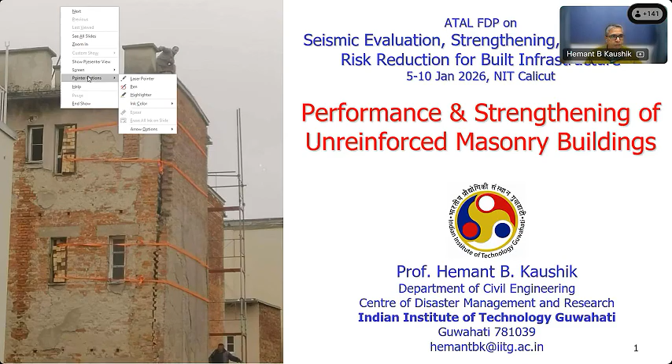The figure you see here is very interesting. I don't know the location of this, but it shows how vulnerable these structures are and how innovative some people are. Somehow they found some technique to keep this wall in its own place. Otherwise, you can see that this is at least 7-8 meter high wall. What would happen if it would fail? Although it is innovative, it is not engineered. Somebody thought something at the last moment and did something just to prevent a catastrophe.

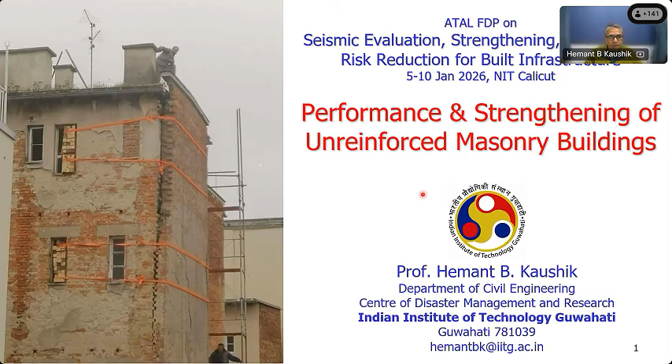Now, such situations, you can see, are found throughout India. You can find such things throughout India, throughout the world. So let me first start with the Indian problem.

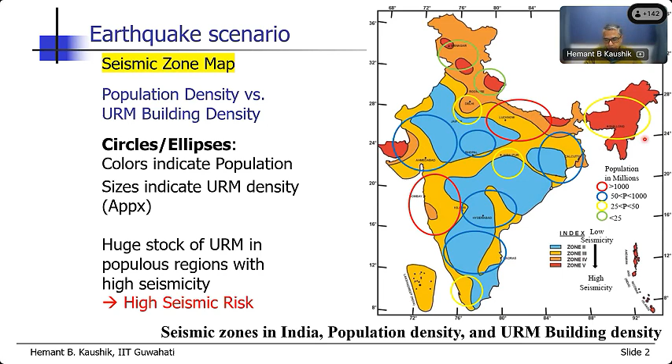This figure actually shows the very high seismic risk we are seeing here: a huge stock of unreinforced masonry buildings in populous areas with high seismicity. That is the problem. Now the question is, how do we deal with these problems? We'll try to answer that toward the end of this presentation.

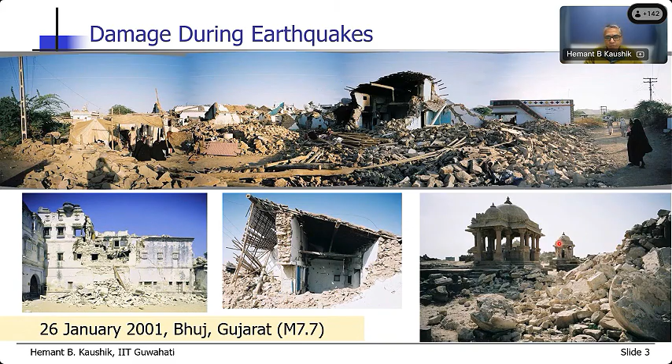Now the question is, why did they collapse? Didn't we have seismic codes or even non-seismic codes for design of these buildings? Don't we know the design of masonry structures? Don't we have good material? All these things come to mind when we see such failure.

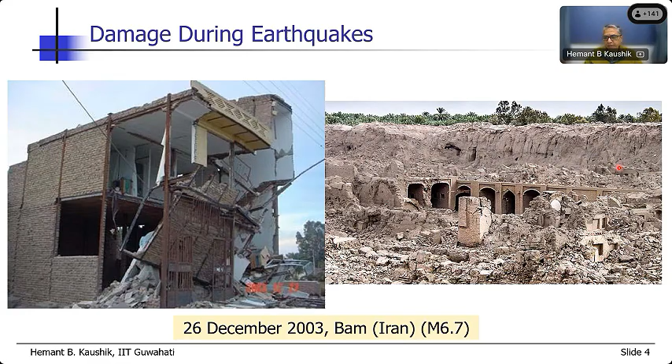Now, it is not only the problem of India. In Iran, a huge number of such buildings collapsed during the Bam earthquake. This left figure is not exactly unreinforced masonry, but barring some reinforcement in the form of steel beams, every other thing is here. All these walls are not really confined using these elements, so you can see the failure. In fact, two complete stories collapsed here, and you cannot see any house here that isn't completely collapsed.

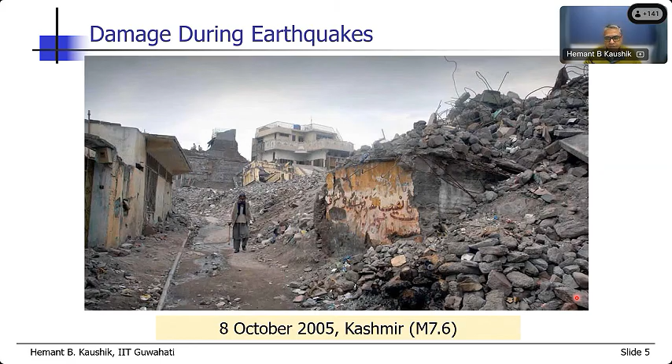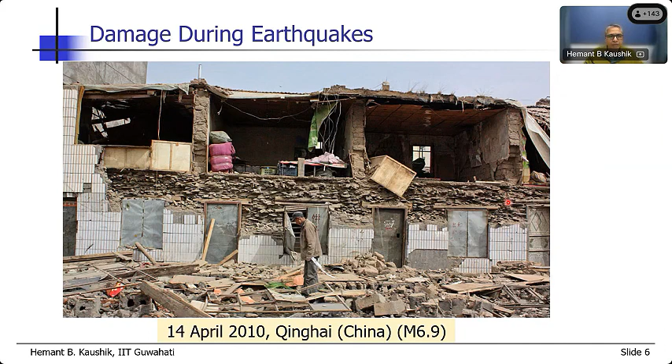In China in 2010, these are mud masonry buildings, mud mortar masonry buildings, again with different types of masonry used - here stones, here slates. You see the thickness of the walls and the slabs is huge, so the mass of the building is really large. The stiffness of these buildings is also large, attracting more forces, but the strength is very low - the tensile strength in particular is very low, and shear strength is very low, so these buildings suffer these damages, resulting in completely out-of-plane collapse of these walls.

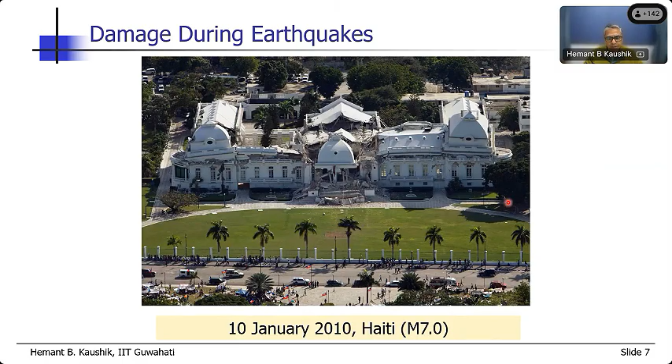In Haiti, a country in Latin America between North and South America, you can see huge palaces constructed of unreinforced masonry collapsing in 2010. A large number of people died during this earthquake.

New Zealand, a developed country - what happened during the twin earthquakes of 2011 was really astonishing to many people. But they have some very old structures; this was a church which collapsed during this earthquake, completely unreinforced masonry. After the collapse, they had a series of discussions for several years about how they were going to retrofit it or reconstruct it.

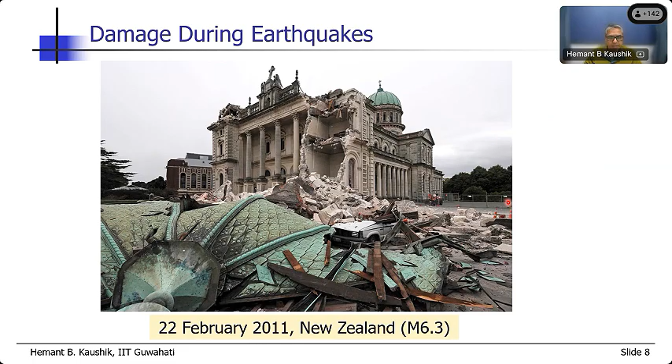Nepal in 2015 - we have seen what happened during that earthquake, with many darbars in Nepal. They have primarily three darbars where there are several temples and palaces, buildings constructed using only unreinforced masonry. Look at the thickness of these walls, again very thick, and the thickness of the slabs. Like I said, most of these buildings collapsed during that earthquake in 2015.

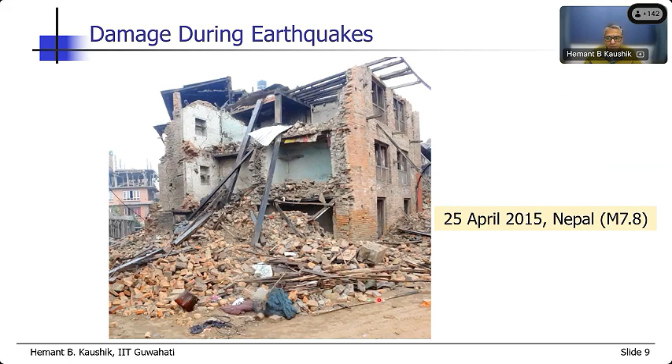These are some common observations we already know about the most vulnerable areas in any structure. The walls near openings are vulnerable because these corners have huge stress concentrations, and damage starts from there. If we can somehow restrain the damage at that location, we can improve the performance of these buildings, and I'll show you some results of how we have done this.

Then, of course, the out-of-plane collapse of walls we have seen in almost all these buildings. Why does this happen? Primarily because there is limited connection between the perpendicular walls, between the wall and the slab, and between other elements of the building. When there isn't proper connection between the wall, the perpendicular wall, and the slab, the wall fails during the earthquake in the out-of-plane direction.

What we have seen during most of these earthquakes is that traditionally constructed masonry buildings, reinforced or laced with wooden material like timber logs or bamboo, survived. There were some damages, but they survived. We conducted significant research on some such buildings, though today I won't show those results. These are really interesting buildings where people didn't have design codes, calculations, or guidelines, but through their own experience came up with certain building typologies.

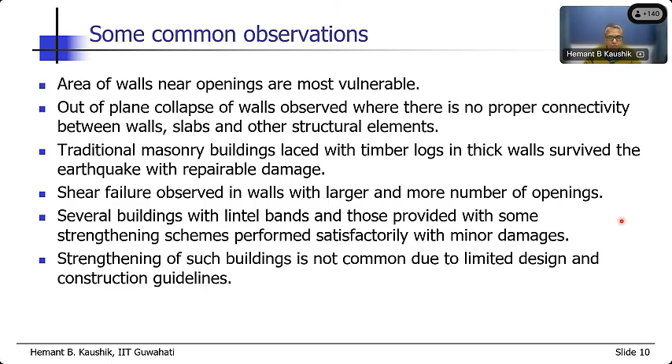We have seen some retrofitting done in these buildings, but it is not common because we have limited design and construction guidelines. In fact, there is no detailed guideline or codal provision available to common people. One technique people have used is strengthening the building using steel elements, which can be used in different forms.

This is a mosque in Port Blair during the 2004 Sumatra earthquake. Many buildings in Port Blair collapsed, but this building, though unreinforced masonry, did not collapse. You can see the steel bands applied on the walls in different ways. The reason was that there was an arch roof here, so to support that arch roof, they provided bars continuous along the length of the building, and on the outside connected the bars on both faces using steel channels. Similarly, diagonal bracings were used in some places.

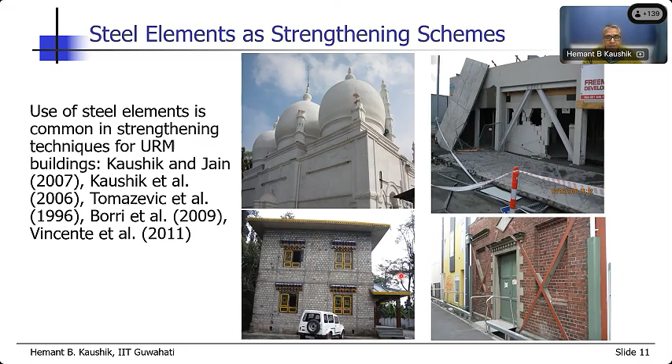This building is from New Zealand, where steel flats were used on the faces of the building. This building is from Sikkim, and it survived the 2006 and 2011 earthquakes without much damage, though there was some damage, again using bracings. People have used these steel elements in different ways without worrying about whether codes are available, since no codes give design criteria or calculations for these elements. But people have used them anyway, and when simple strengthening schemes were used, these buildings survived. This means even minor retrofitting or interventions at the correct time can influence the performance of these buildings and save them.

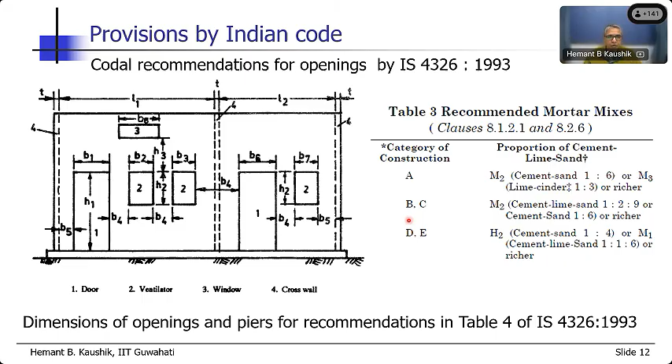Let us look at what provisions are given in some of our codes. We have a very old code, 4326, which will be replaced now, but there are some interesting provisions here. It gives recommendations for the dimensions of openings - any unreinforced masonry wall may have a door opening and multiple window openings. They've given recommendations for mortar mixes, what kind of mortar can be used, and recommendations for these dimensions - how far the door should be from the cross wall, how far from this wall, what the height and width should be. All these dimensions are given, but these are only guidelines for the size and position of openings in bearing walls. Other than that, there are no provisions for strengthening.

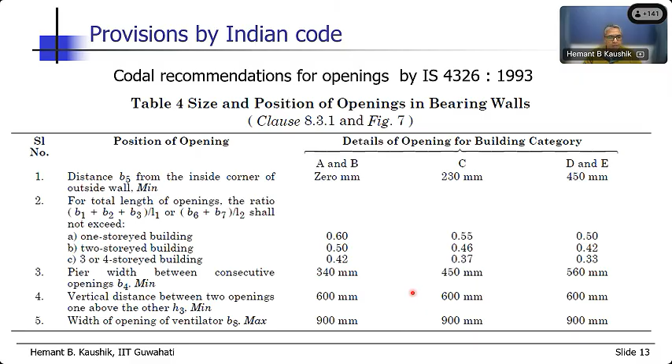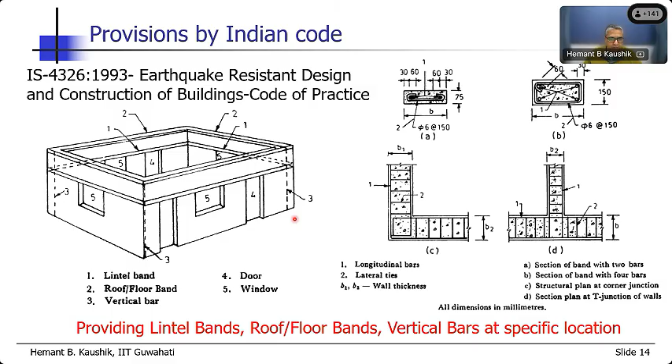They also say that you can provide some vertical bars in the walls. So these dotted lines here, these are the vertical bars.

Here's another code, 13828, again a very old code. It will again be replaced, but it also has some provisions on how to improve the performance. They say that you provide alternating tooth joints in walls at the corners and the T-junctions, which is generally used by the masons.

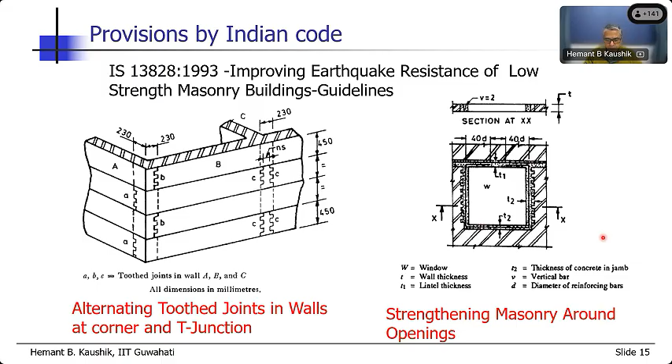It also says how to strengthen the masonry around the opening. They say you provide some reinforcement bar around the opening to improve the performance, because of the known issue that these are the places where we have huge stress concentrations. These issues are known to everybody, that we need to strengthen them. But then you can see yourself how many buildings have these steel bars or these bands at different locations.

Another retrofitting scheme, or here this is not retrofitting but the repair scheme proposed by the code, is grouting or epoxy injection. So whenever we have weak walls, we can inject this grout or epoxy.

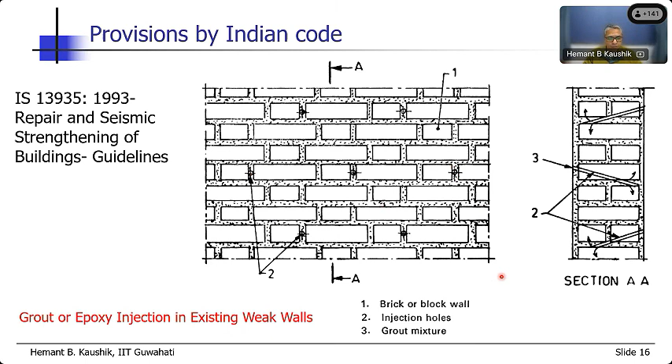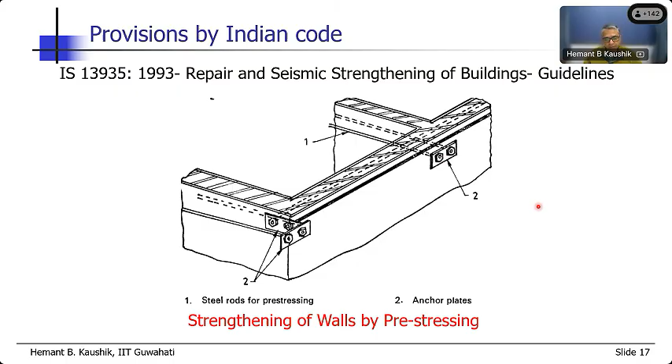One interesting scheme proposed in the code is using pre-stressing bars, strengthening of the walls by pre-stressing. This is extremely difficult because it depends on the quality of the wall, what is the strength of the wall. But anyway, the method is given, and I've seen some buildings strengthened using this scheme.

This code 13935 has another interesting strengthening scheme. It says use the splint and bandage technique for strengthening. Splint and bandage are these members, horizontal members and vertical members. This is the bandage that we provide around the building to keep these walls together. This splint and bandage technique can be used in a variety of ways, and they have also given some guidelines on what kind of wire mesh can be used here.

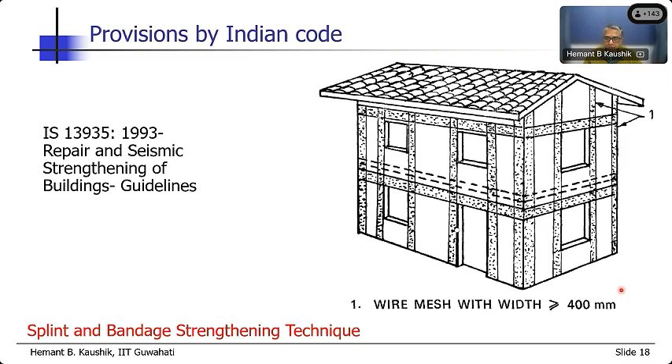Now, though this information is there in some of these IS codes, the most important details about the tensile strength of masonry, about the strength of these steel elements or any similar strengthening elements used to strengthen, are missing here. There's no information on a particular type of strengthening scheme or a particular requirement. So we cannot use every scheme for every purpose. We have to first find out where is the vulnerability, what kind of strengthening is required. Then only can we think of developing a scheme.

We require special material and skilled labor for some of these techniques, for example the pre-stressing, right? It's not easy to do. The diagonals, not easy. So these require materials which are not available locally, as well as labor which is not available locally. So it becomes very expensive, and when it becomes expensive, people do not tend to use these strengthening schemes.

There are a few methods which are very simple and inexpensive, but there are no design guidelines. For example, the splint and bandage technique, the steel flats - all these are really simple. They are inexpensive, material will be available, but there are no guidelines, like what is the size, how much is the thickness, what is the strength - that is not given. Only the broad guidelines are given without any reference to the capacity or demand.

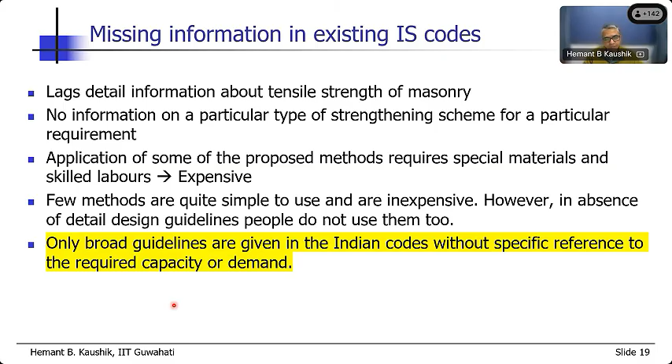So then we thought let us try to see what is the effectiveness of some of these very simple techniques in strengthening these walls. What we did, we considered a full scale wall, 3 meter height by 3 meter length. And we considered 3 types: one wall with door, one wall with window, and one solid wall without any opening. We tested these walls under quasi-static loading applied at the top of the wall, on the RC slab.

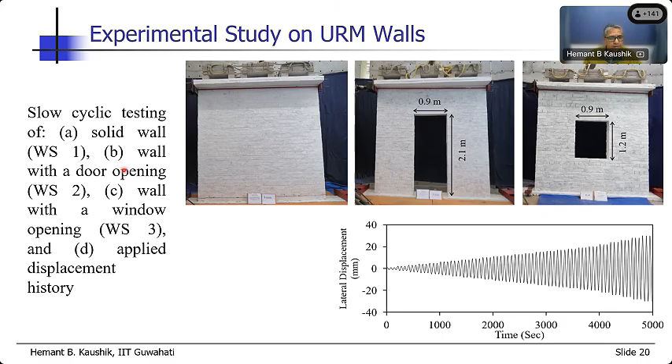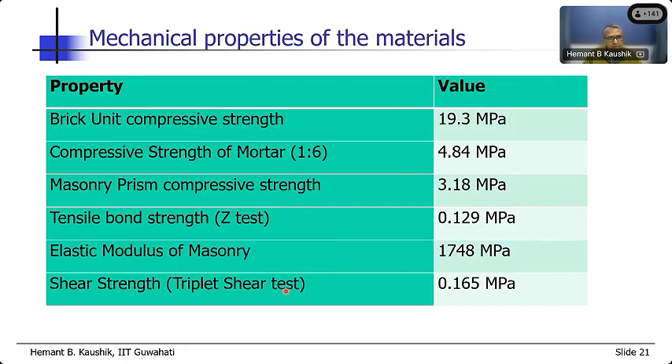It's a simple quasi-static test with very low frequency, without worrying about the inertial or damping effect, just to compare how these buildings or walls behave in comparison to each other. These are some of the properties of the bricks, the mortar, and prism.

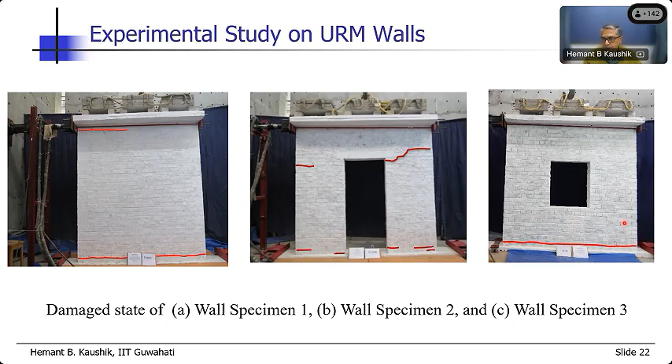Let me show you one video here that will give you some idea on how brittle these walls are. I'm sure you must have seen some videos of failure mechanisms in reinforced concrete frames, how ductile they are. But in this case you will find how brittle they are and how quickly they fail.

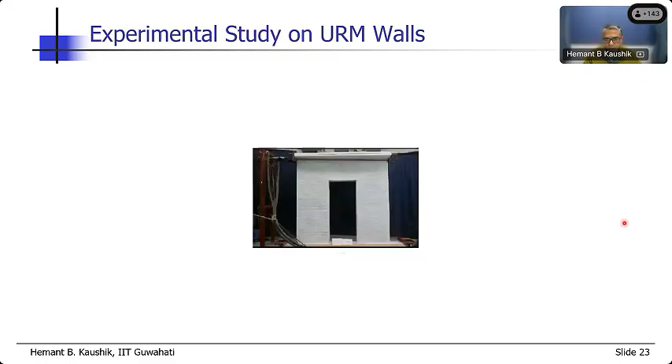You can see here that we started applying the load at the top. I'm showing you this video in a fast forward manner, but the actual test was conducted very slowly. You can see the displacement applied at the top using this servo controlled hydraulic actuator, and you cannot see any damage so far in the wall, though you can see people moving there.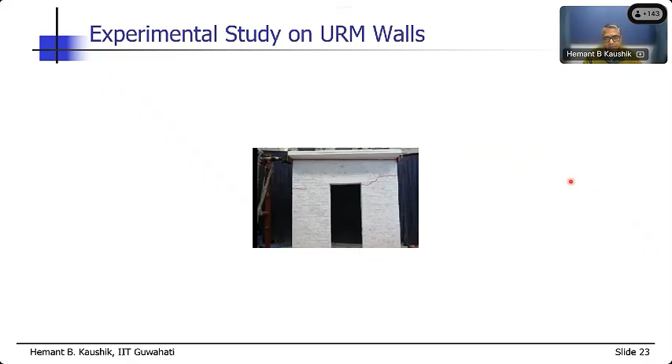But then suddenly we found this type of failure instantly, and we had to stop the test in an emergency because it failed immediately. Because it was just a single wall, there was nothing stopping this wall from falling out of plane. So this is a very sudden failure.

Here I'm comparing the hysteresis loops for the three walls. The first wall is in red, the second is the wall with door opening, and the third is the wall with window opening, and these are the peak points. This is the same figure but without hysteresis - just showing the envelope of these curves.

You can see the presence of a door here reduced the strength as well as deformability of these buildings, and we've seen that the crack started forming right at the door opening, so it failed immediately. How much was the displacement it went up to? About 7 mm. You wouldn't even feel that or see it on the computer screen - 7 mm displacement and it failed, which is very, very low by any standards.

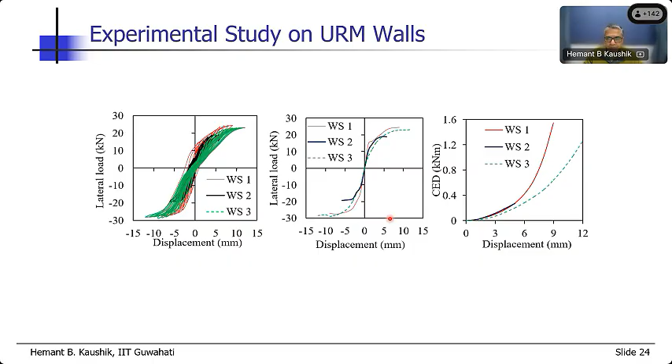Then we thought it's not fruitful to just test one wall, so we tested the entire building. This is a full scale 3 meter by 3 meter by 3 meter building, tested in our laboratory at IIT Guwahati under quasi-static loading using the servo controlled hydraulic actuator.

Then we strengthened this building using steel flats. One scheme used a single steel flat throughout the building at the lintel level. Then we used another scheme with steel flats at the lintel level as well as the sill level, and also all around the openings.

These steel flats were also provided on the inner face - wherever you see a steel flat here, the same steel flat was there on the opposite face too. We connected these steel flats using a bolt at regular intervals. So this is a very simple technique - we don't need to damage the building, and no chemicals are used. It's very simple, very quick, and inexpensive, using local material and local labor.

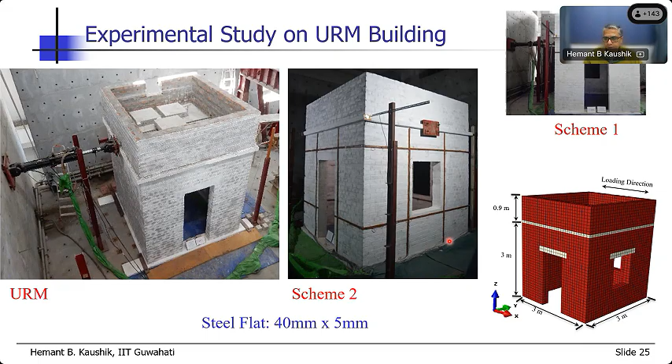This is how the different walls were. This is wall 1, the solid wall. Wall 2 is with the door opening. Wall 3 is with the window opening. And this is again wall 3-star, the wall with the window opening, but in the out of plane direction of this loading.

If you remember the previous figure, we have already tested wall 1-star, wall 2 this is door, and wall 3. So these 3 walls we have already tested in the in-plane direction. We know individually what is the strength or capacity of these 3 walls, but that is individual. Here we will see what is the capacity of the entire building when we join these 4 walls.

Simple, without using any steel flats or bands, and then with the use of the steel flats.

This is how the steel flats were provided. This gray members here, these are the steel flats, and they were connected using this nut and bolt arrangement at every 0.5 to 0.7 meter. So this is clearly given here.

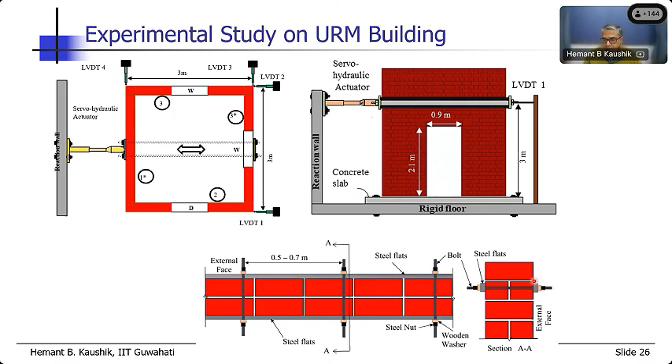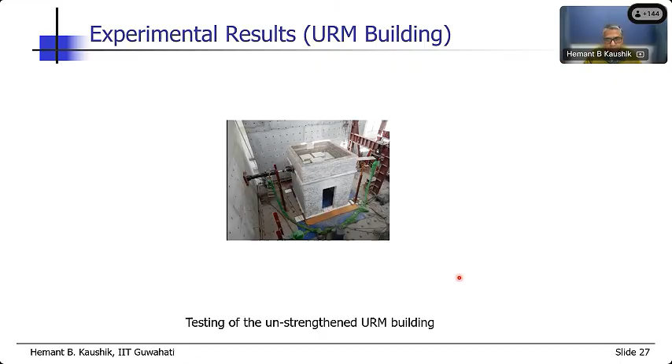Let me first show you the test that we conducted for the unreinforced, unstrengthened building. And then we will strengthen this using steel flats. So here I'll show you the instant where the cracks start here.

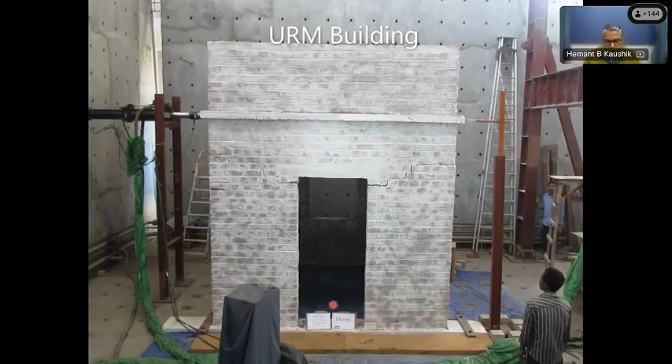So this happened at a lateral displacement of about 17 to 18 mm. Now, when that happened, you can see that though the failure has taken place, because it is a three-dimensional building, the building starts rocking. This is called a rocking type of behavior.

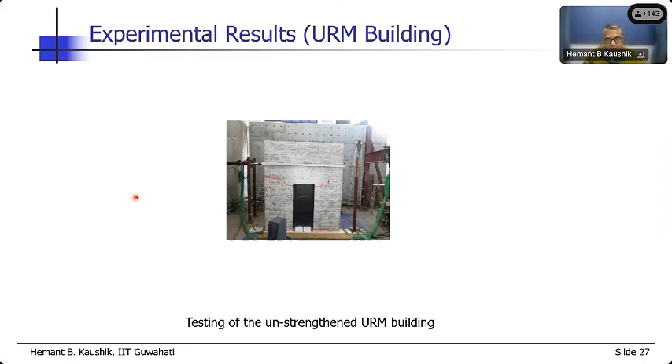You can see here that we are applying the load in a cyclic manner, positive and negative. But though it has failed because of four walls connected together, the building stood there. And you can see the crack formation at different places.

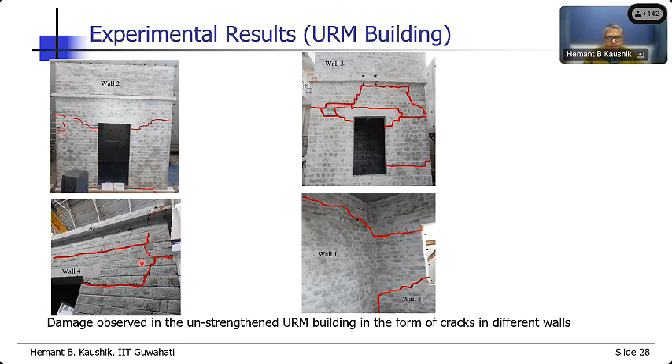Then we strengthened it using very simple, just one band here. Now this is applied externally. There is nothing, no cement, no mortar, nothing. Simply we drilled the hole, and with the help of the nut and bolt, we connected this steel flat to the wall on both the faces.

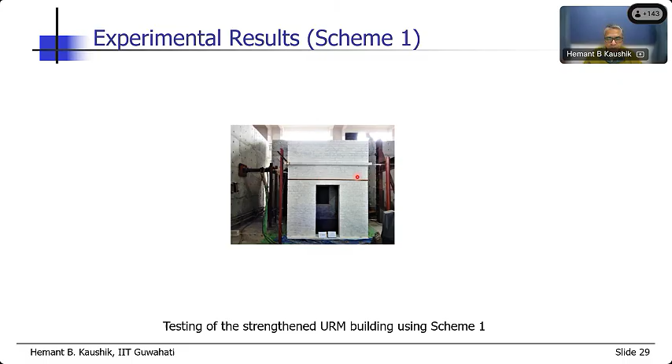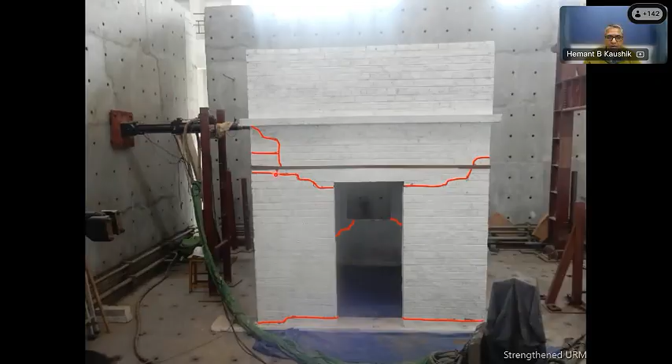Let us see how the building performed when we have this. So now we reached 22 mm, at which these cracks were quite large. Now you can see the rocking has reduced because of the presence of these steel bands. This band is actually resisting the crack, because you can see the crack flowing through the steel flat, right? And that is what we want, that the crack should pass through the steel flat so that the strength of the steel flat comes into picture.

So you can see here the cracks were still forming through the openings on all sides, all the walls. But then interestingly, what we observed is that even this steel flat, it broke at one location. This is a very good thing to see, because then we could demonstrate that the strain and the stresses in the walls are transferred to the steel flat. Now, when that happens, that shows that the strengthening scheme is working.

Because you can imagine when the steel flat would not be there, then this would be an immediate failure. But when the steel flats broke or failed, it must have failed with some ductility. So that is the beauty of this very simple strengthening scheme. There's nothing very complicated here.

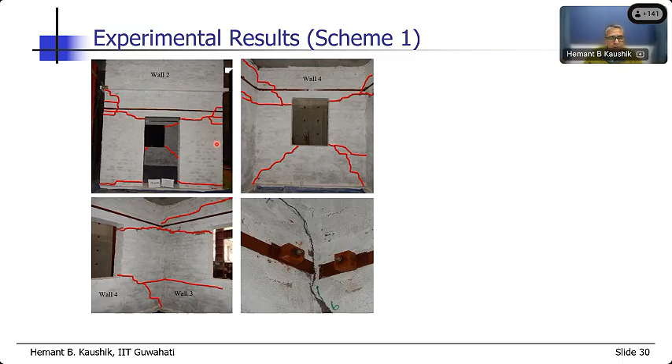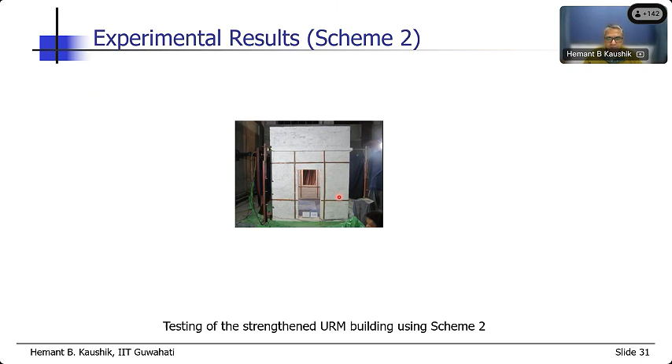Then we added some additional members, the steel flat at the sill level, the steel flat around the openings, all around the building. Let us see how the building has performed.

So at about 30 mm now, we see that the cracks started appearing along the whole length of the building. But you can very easily see how the entire building is now moving instead of just movement of the top part of the building, right? And then it is holding the bottom part of the building, the steel flats, they are holding very nicely.

Let us see the cracks. Now you can see cracks forming everywhere, because that is how the brittleness of the building plays a role, and the low tensile strength of the masonry plays a role. There will be cracks, of course, but the steel flats restrain these cracks and resist the load, which is what we want.

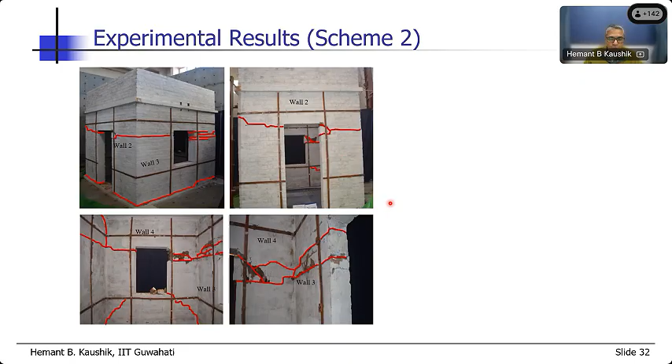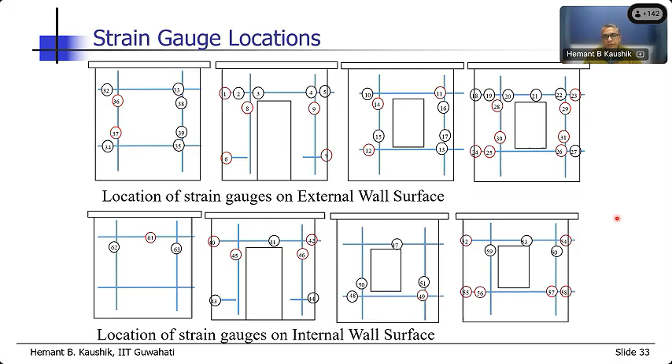Now, in all these steel flats, we used a large number of strain gauges. You can see here in all these walls, external as well as internal, these numbers indicate the strain gauges. Wherever you have a red strain gauge, we found significant strain development, and this is the strain that was recorded.

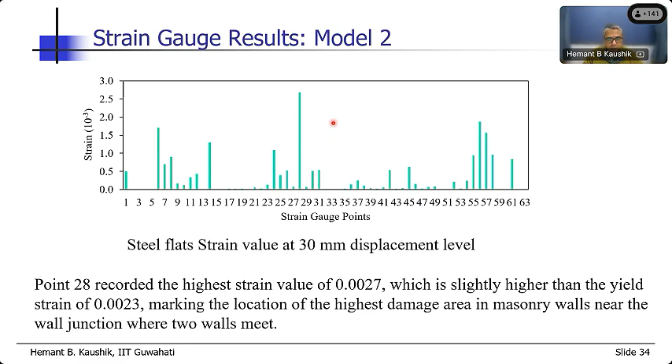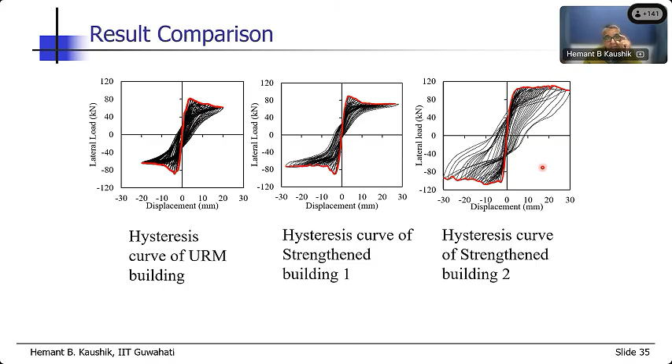And these are the comparisons of the hysteresis loops. This is the hysteresis curve of the unreinforced masonry building, this is for scheme 1, and this is for scheme 2. You can see how drastically the performance was different.

We'll compare the envelope curves. This is unreinforced masonry, and for scheme 1 there's a marginal increase in strength but a significant increase in deformability. But with scheme 2, there's a significant increase, about 38% increase in strength and about 50% increase in deformability. This shows how effective these very simple strengthening schemes can be for unreinforced masonry buildings.

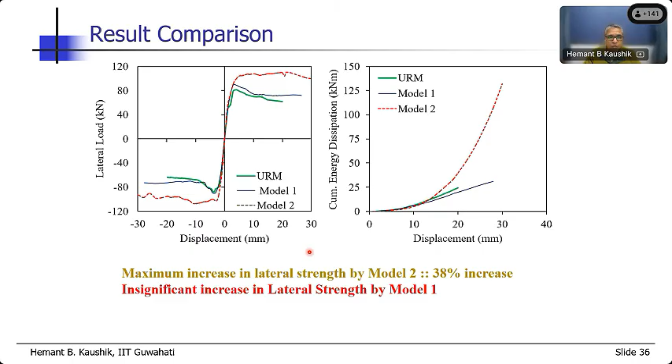Why has it become effective? That is because the original tensile strength of these URM buildings is very, very low. So even a very simple member resisting tensile load improves the building's performance drastically.

These are some of the major observations: the load carrying capacity of the strengthened building increased by about 38%, which is good. But more importantly, the lateral deformability of the strengthened building improved significantly, by almost 50%. That is what we were looking for.

How do we delay the failure? How do we delay the brittle failure in these buildings? Of course, the final failure will be brittle, but the delay is very important for such brittle structures. The hysteretic response was more stable and better for the strengthened building, as we have already seen.

From the strain gauge readings, we found that the corners of the openings are the most critical areas needing special attention, because there was more strain at those locations. We can significantly improve the lateral load behavior with the help of these steel flats, and we can reduce the vulnerability.

The advantage of this is we can very easily replace these steel bands. Even when they fail, we can simply remove them and provide an additional steel band. That is what was done in the Sikkim building, if you remember that figure I showed, where steel bands were used in an archive building in Gangtok. The motivation for this study came from that earthquake visit. They used to replace these steel flats once corroded or damaged, whatever the reason, earthquake or non-earthquake, very easily. That is one of the major advantages here.

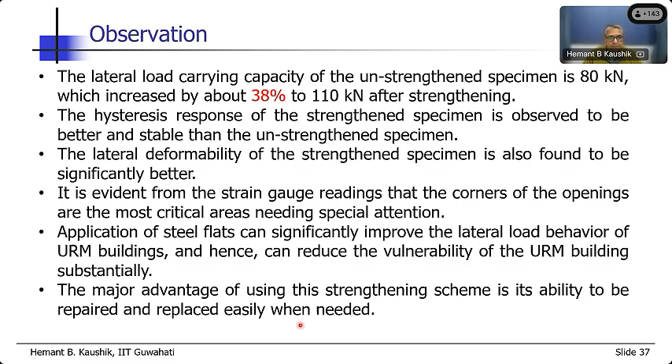Once we had all this, the next stage was to find a design equation or method to know how much steel flat is required for a particular wall or building.

So we simulated these walls and buildings in software. We used two software: Strand 7, specifically developed for unreinforced masonry buildings in Europe, and Abaqus. We used both just to check our results, and we were quite happy with how both softwares modeled the failure. You can see the crack formation in both models, in Abaqus as well as Strand, in the same location. Wherever we found it experimentally, we could simulate similar behavior in the numerical models.

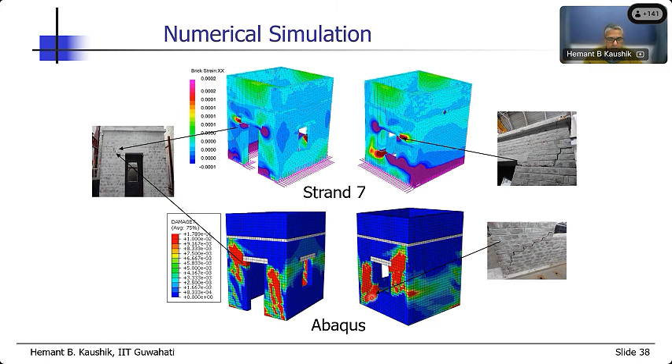So the next stage, once we have the numerical model ready, which is validated with the experimental study - this figure shows the validation. The next stage is to do some parametric study, to develop understanding on how different parameters affect the strength and deformability of these buildings. So this is one validation figure shown here, numerical versus experimental.

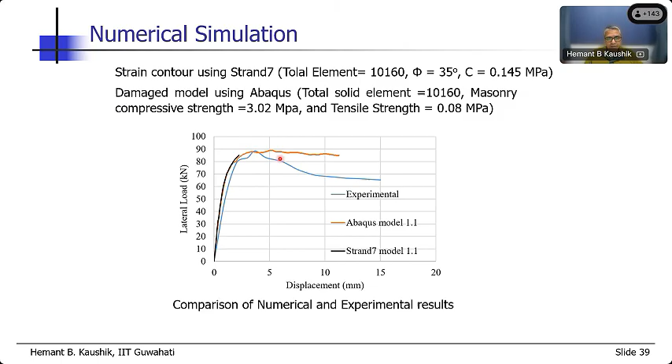Strand 7 couldn't do nonlinear after a certain level, but Abaqus we could do nonlinear analysis. This is the numerical analysis in which we use different sizes of the steel flats. You can see here 1 mm thick by 5 centimeter wide, 1 mm thick by 10 centimeter, 1 mm thick by 15 centimeter, 1 mm by 20 centimeters. Four different types of steel flats were used.

Here we used the same width of the flat, but we changed the thickness of the flat. So 1 mm, 2 mm, 3 mm, 4 mm, keeping 5 centimeter as the width of the flat. This is for scheme 1, and these results are for scheme 2.

You can see here, a very interesting thing that we observed, is that it really did not matter what the size of the steel flat was. Even for the very low 1 mm by 50 mm steel flat, the performance was really nice. And as we go on increasing the width of the steel flat, it did not matter - the strength was more or less the same, because the failure was occurring in the masonry. So masonry is weak, it does not matter how strong, thick, or wide this is.

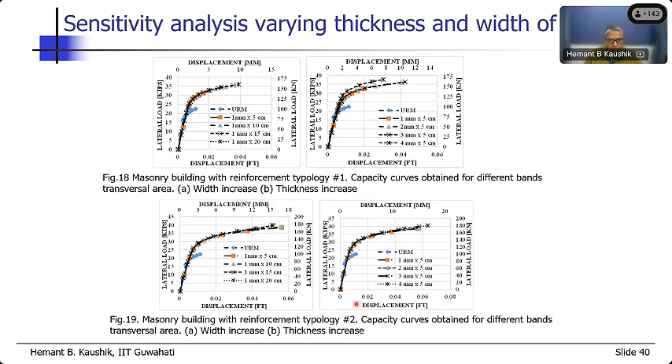There was a minor difference when we used thicker steel flats, but most of these results lie along the same region. In scheme 2 also, whether we increase the width of the band or the thickness of the band, it really did not matter. But if we increase the tensile strength of the masonry, then we have significant variation in the performance. So the conclusion from here is, though we provide a very small band, the performance increases drastically, and that is very interesting.

Then based on all these results - I'm not showing you all the results, by the way, we used several other parameters. For example, the aspect ratio, the thickness of the wall, the area of cross section, and the tensile strength of masonry. We used different tensile strength, different aspect ratio, and different thickness of the walls. So some of these, I'm just showing you some results, but not all here.

Finally, we carried out nonlinear regression analysis for all this data that we developed, and this is a very simple equation using which you can get the strength of the strengthened building, the lateral strength of the strengthened building. So you just need the tensile strength, the aspect ratio, thickness of the wall, and cross-sectional area of the steel flat.

So alpha L is basically the ratio of the strength to the self weight of the building. So you can directly compare it with the seismic coefficient given in IS 1893 - they are directly comparable. And when we compared it with the experimental results, the error was about 18-19%, which seems high, but those who work on masonry will appreciate that this 20% error in masonry is very, very low, because masonry is a very uncertain material.

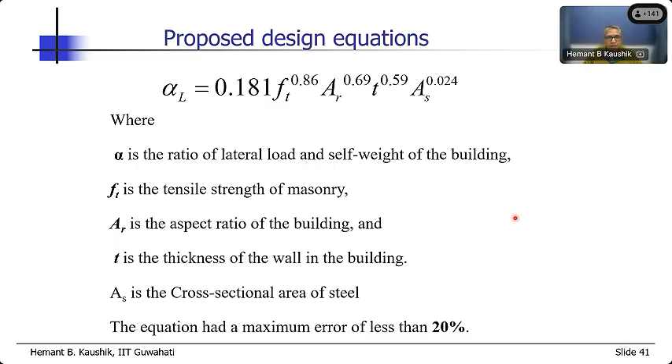Now, there are numerous other methods which people have used, even in IIT Guwahati - there are students working on other methods of strengthening of URM, because this is what we are going to need in the next 10, 20, 30, 40 years, since so many unreinforced masonry buildings are there, and we have to reduce the seismic vulnerability. So we need these simple strengthening schemes. People are using ferrocement bands.

This is one such study that we are conducting, where we used a similar full-scale building with ferrocement bands in different ways, different manners. Then people are using FRP wraps, steel diagonals in the walls, and also at the slab level horizontally, providing steel diagonal bands there. Then shotcreting, which is basically putting micro concrete on the surface of the wall.

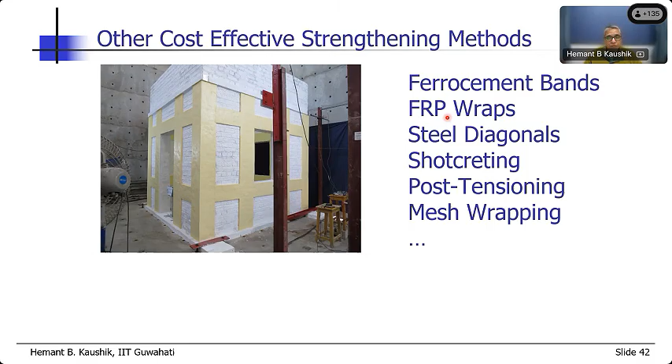Post-tensioning, I've shown you some figures, which our IS codes mention. Then the mesh wrapping the entire walls, and so on. There are so many methods and techniques available in the literature, some without any guidelines, just suggested without testing. Some methods are given in the codes, like in our codes, and for some methods there are detailed guidelines in international codes. For example, the ferrocement bands have very detailed international guidelines because people have used them previously. For FRP wraps, there's not much guidance for masonry, but for concrete you have very detailed guidelines, and so on.